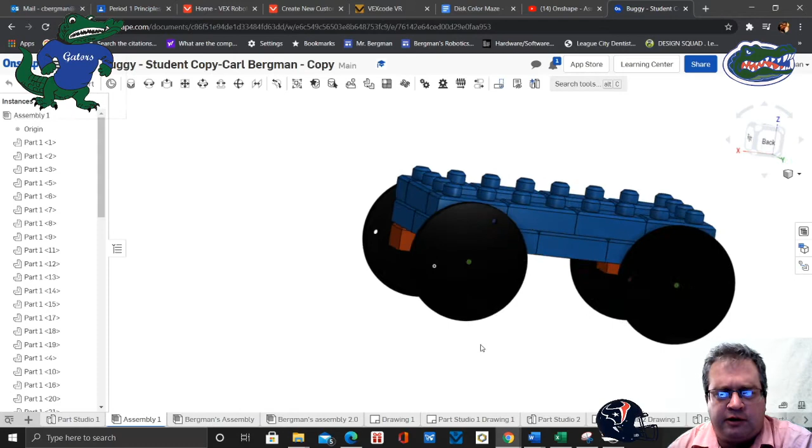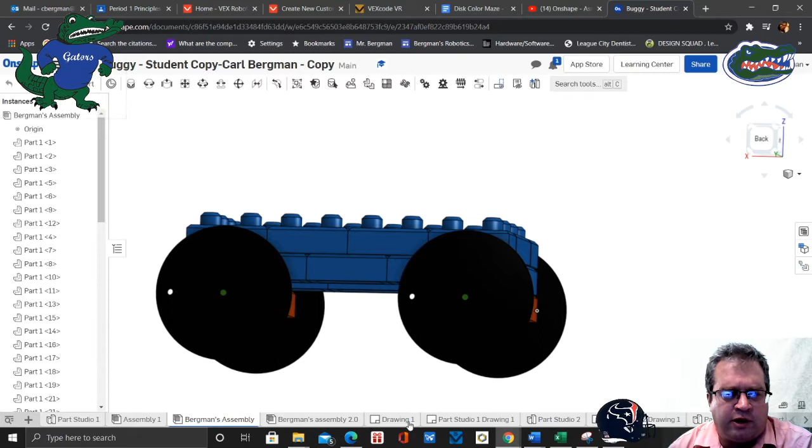This is the buggy you're going to create. The library's there for you. I'm going to walk you through it, and I'm actually going to build half of it for you, then share this with you, and you're going to finish it out. Along the bottom, you can see the different files and sketches created for this project. We're going to use 4 red bricks for the axle connection, and the chassis is going to be made out of the blue bricks.

All right, so that's drawing 1. That's your axle, and that's your wheel.

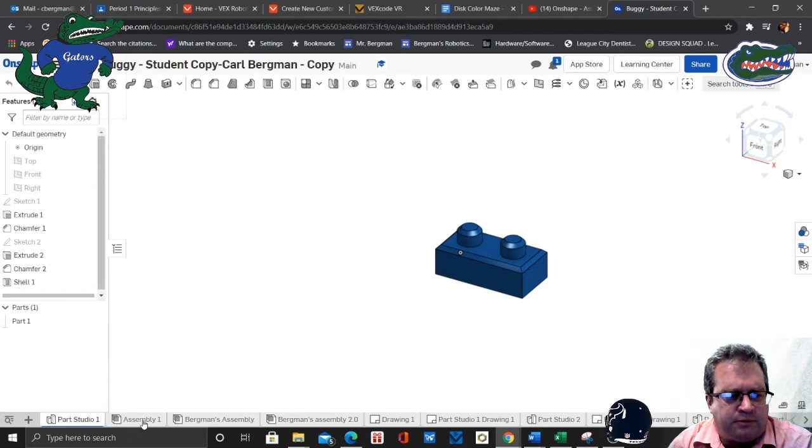All right, so what you're going to do is go to that little plus sign at the bottom, and you're going to create an assembly.

That dot is your origin in the middle, so everything's going to be centered around that dot. Let me fix something real quick.

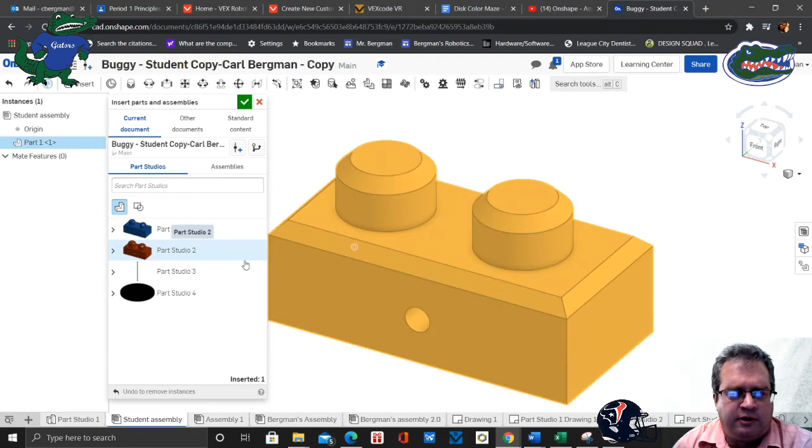You're going to insert just enough bricks to work with. You don't want too many bricks in there because it gets too crowded—as you make progress, you can bring in more. You'll need at least 2 bricks to start, and 3 or 4 blue bricks, and spread them out, zoom out, so you can keep your bearings on how much workspace you've got.

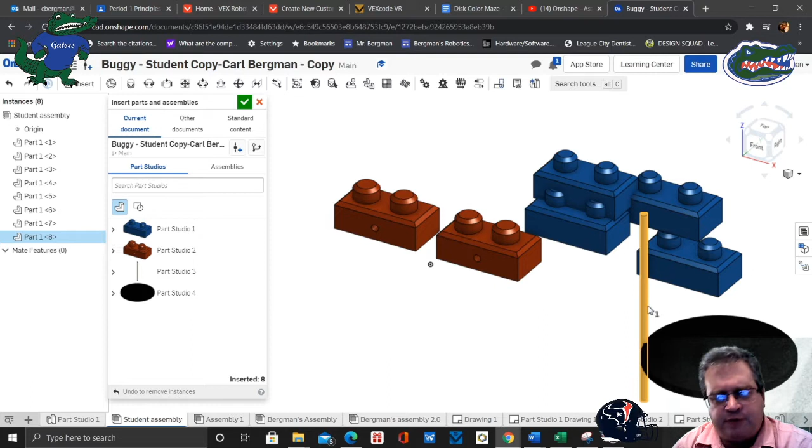And you're going to need an axle and the wheel. You want to place these on the screen workspace away from the origin, which is that dot right there.

Let's see if I can bring up the assembly. If you look underneath the buggy, you'll see a white dot on the side—that's the origin. They connect that brick to that origin, so you're working on the same plane, the XYZ plane.

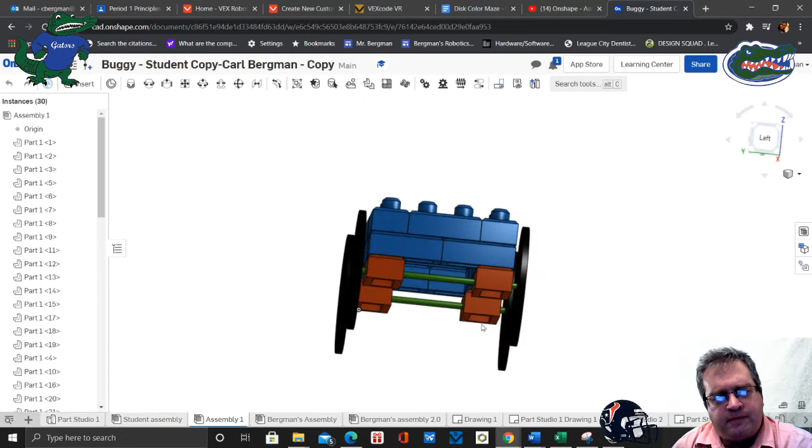All right, so we're going to take that one brick and use our tools at the top, which mates all these together. You see they put their origin on the inside—we're going to put it on the outside of that corner instead of the inside.

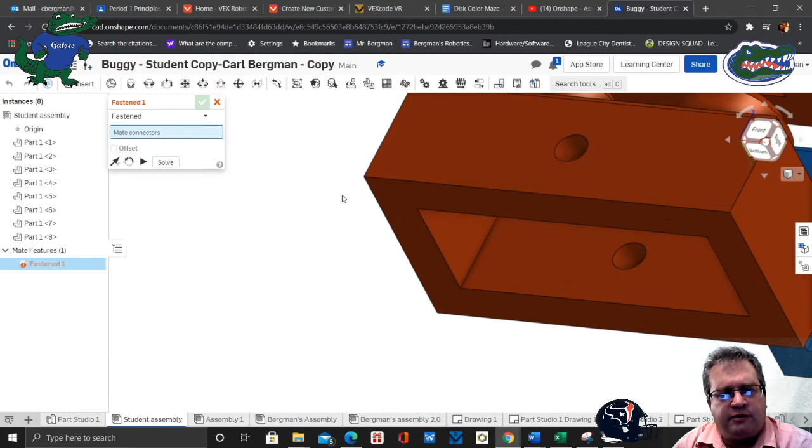This is important that you get this right, because you could be thinking you're on the right plane when you're actually on the wrong one. You've got to make sure that arrow is pointing down, that blue arrow or blue line. So you select the 2 blue lines, line them up, check mark—that's lined up, and so that brick is locked in place. All the other bricks can move around, and you start locking these things in.

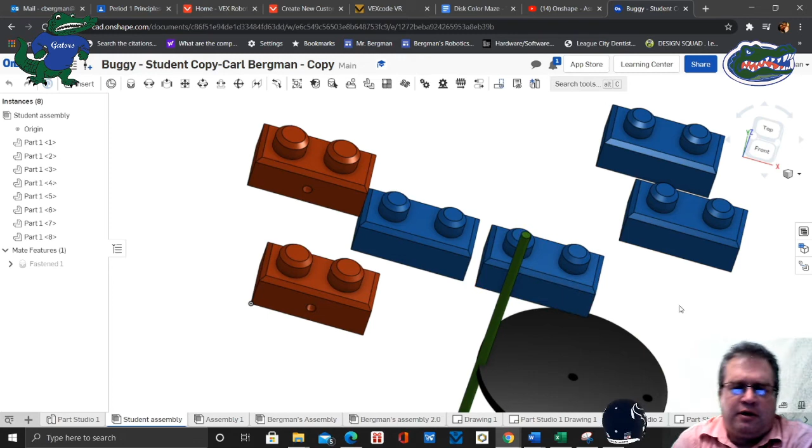We're going to move some bricks out to make some space, and now we're going to start snapping these blue bricks onto the side, because the red bricks are connected to the axles, and the blue bricks are your chassis.

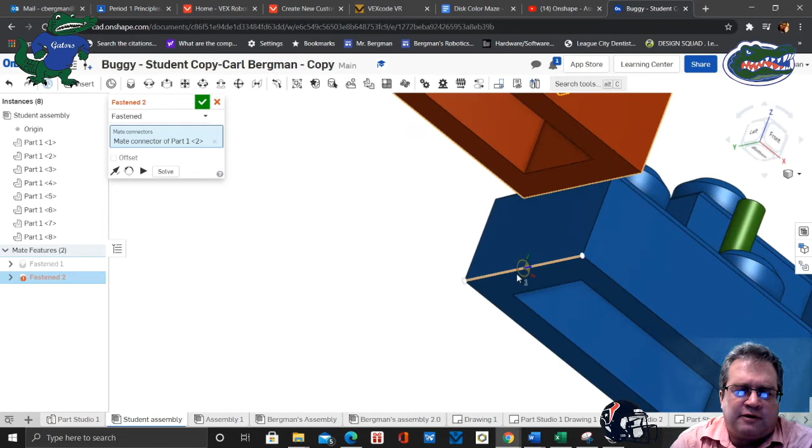We're going to pick the top dead center of that brick and line that up with the outer edge of that blue brick. Make sure you point down. There you go, lined up. You think you got it, then click your check mark, bring it out, and bingo, there it is.

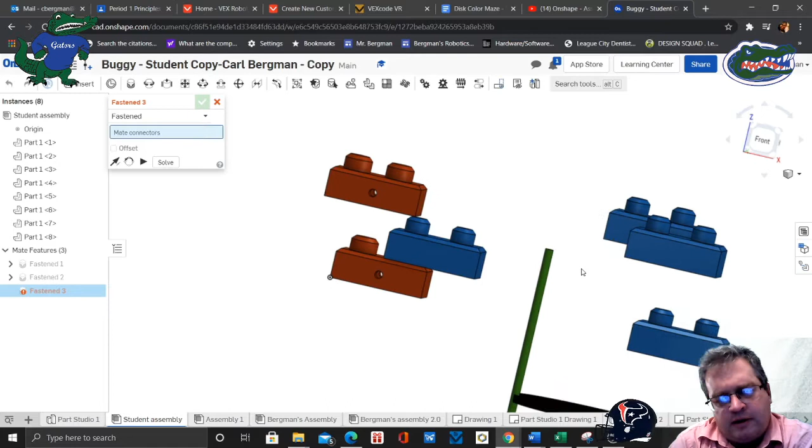All right, snapped in. Now you're going to continue building this side of the buggy, and eventually we're going to put the axle on the hole in the red brick.

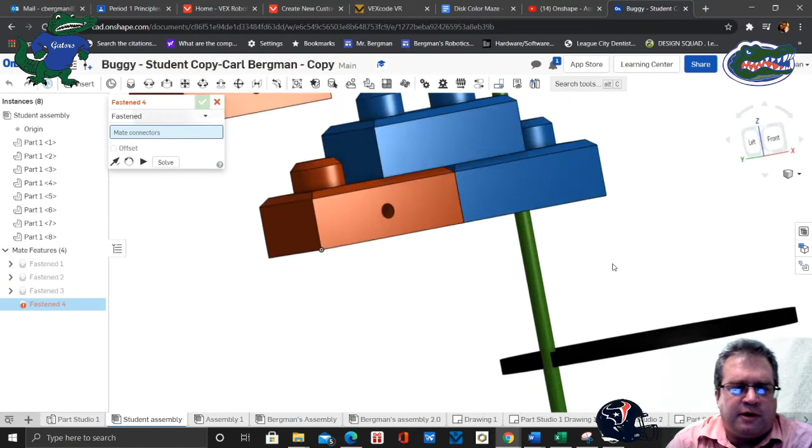All right, so now whatever bricks you're going to work with, you want to try to drag them close together. We're going to get the dead center on that one and the dead center on that one. Click it, and that's using our fastened mating tool.

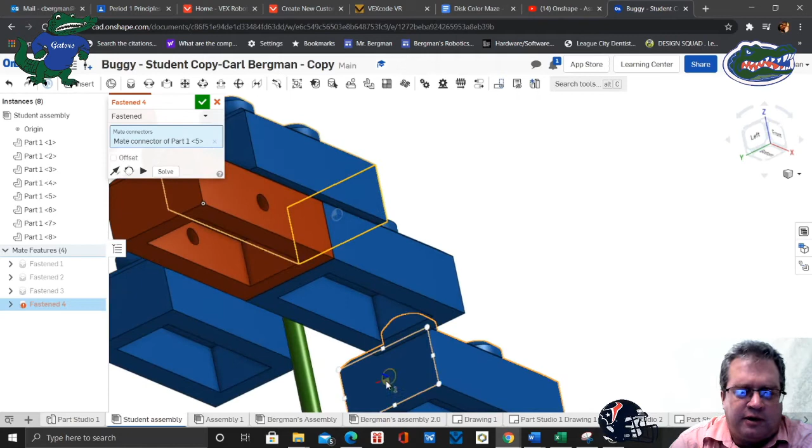Then we're going to get more blue bricks, bring them in, drag them over, snap that into the dead center on that one, then flip it around, pick the dead center on that one, and check mark. Got it. All right, so we're starting to make some progress.

It doesn't look like a buggy yet, but we're getting there. So we're going to close out the tool so you can drag stuff around, because if you leave the tool open, it does weird stuff.

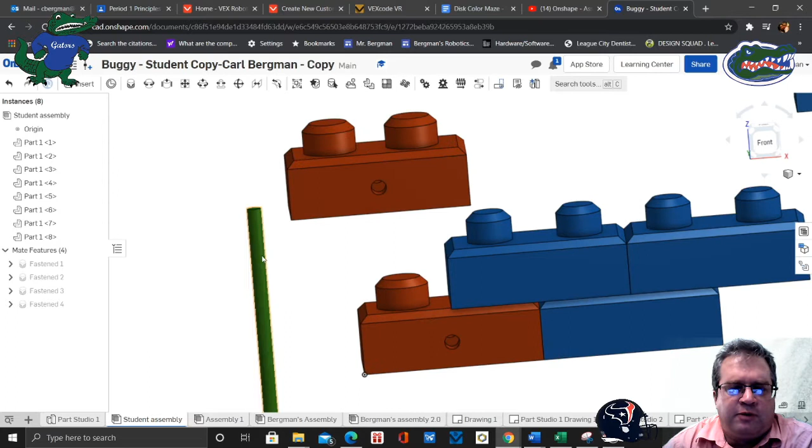So we're going to pick the revolute mating tool, because we want this to turn. We're going to zoom in on the front, the top, get that blue line, and make that go where the axle goes—make sure you've got it lined up.

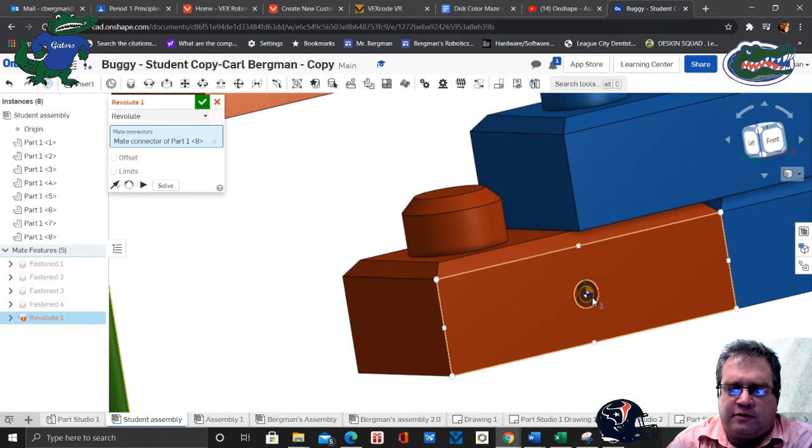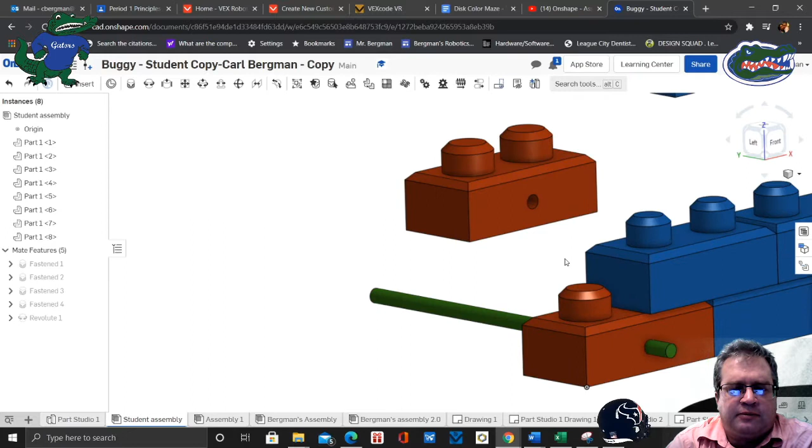We're going to have this offset by about half an inch so we can attach the wheel onto the outside of the axle. So the axle is going to be fastened to the... because we want the wheel to rotate with the axle. We want the axle to rotate, but we want the wheel to be fastened.

So we're going to pick the fastened mating tool, and that's going to be basically glued onto the axle, but the axle does rotate. If you look at the wheel, you can actually drag the wheel by clicking, holding, and dragging, and it'll turn with the axle. The axle turns, but the wheel is fastened to the axle.

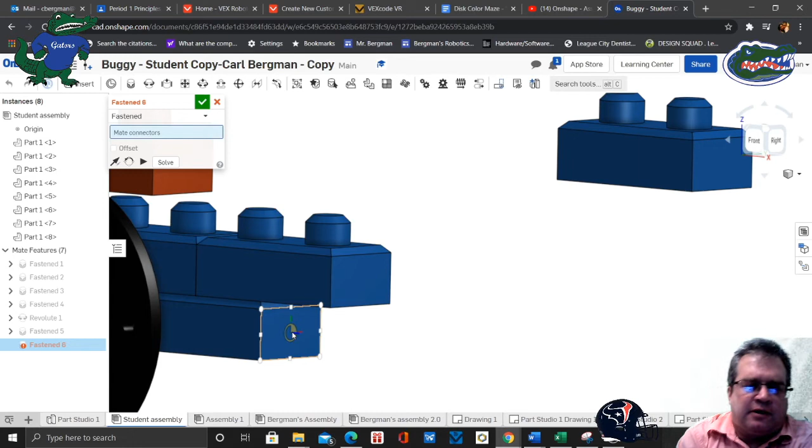So we're going to continue putting the blue bricks on there, and I think the original build shows 2 whole bricks in between each wheel, so we have to put at least one more blue brick on top there.

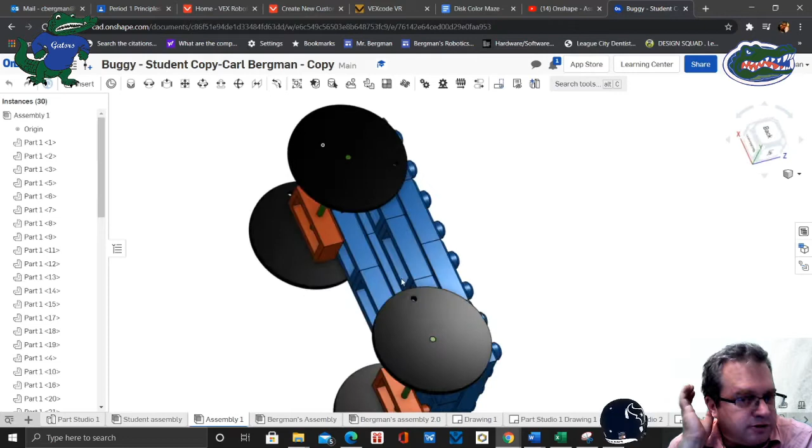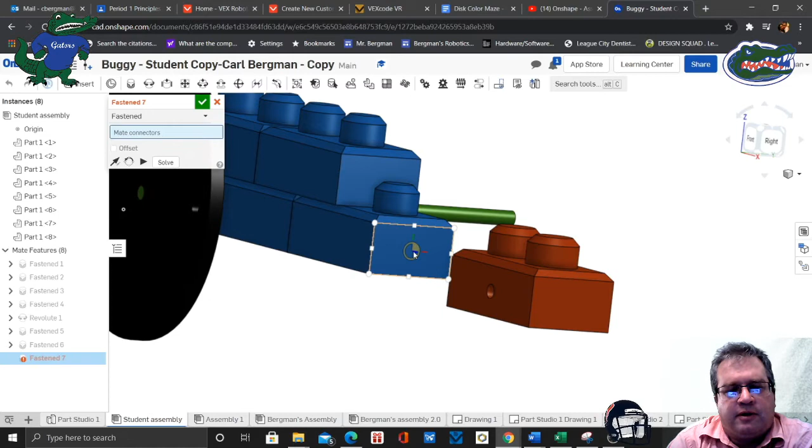So this is about the time you need to draw in. You've got 2 full brick lengths between the wheels there. So we need to bring in some more blue bricks, and you might as well bring in the axle and the wheel as well. We can go ahead and put the red brick ready to put on that bottom, and we're going to fasten that. It's like the center and center, and then check mark.

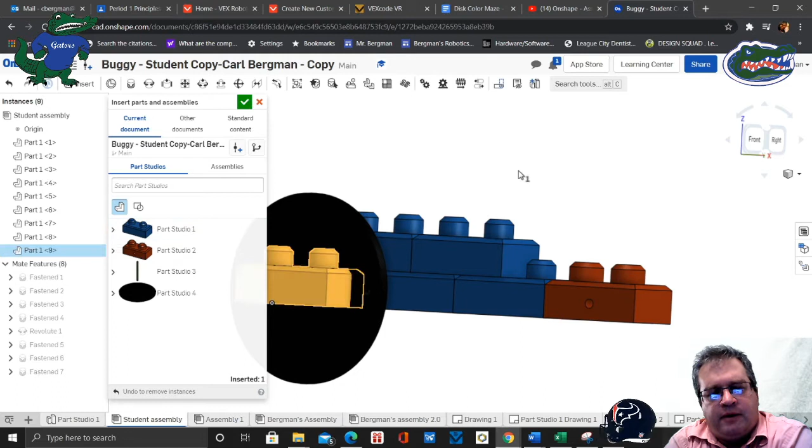All right, now we're ready to bring in some more parts. So bring in an axle, insert axle, wheel, some more blue bricks, and let's see, yeah, an axle and a wheel.

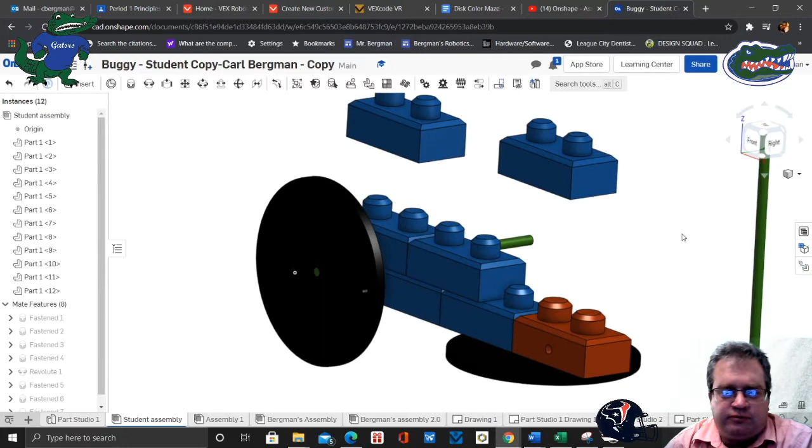Close that out. All right, so we're getting to the toughest part where we need to turn that corner. Let's put the bricks on there first, and check mark, and we're making progress.

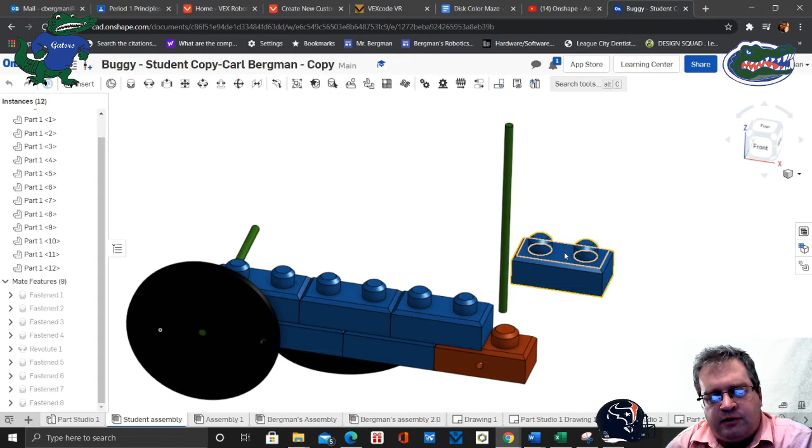So we're going to have to turn that corner, so we're going to take that blue brick and turn it 90 degrees. We're going to close that out so we don't do any weird stuff, and we're going to turn that to help us turn the corner. So you type in 90, it'll rotate that for 90 degrees, and then this is where you have to really pay attention to the close details.

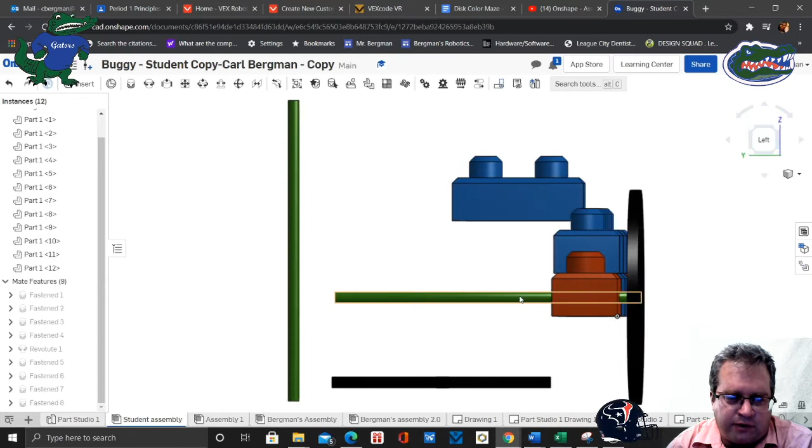We're going to shift 1, shift 2, shift 3, that recenters your object, and we're going to look at an isometric view to get a better idea of where we're going.

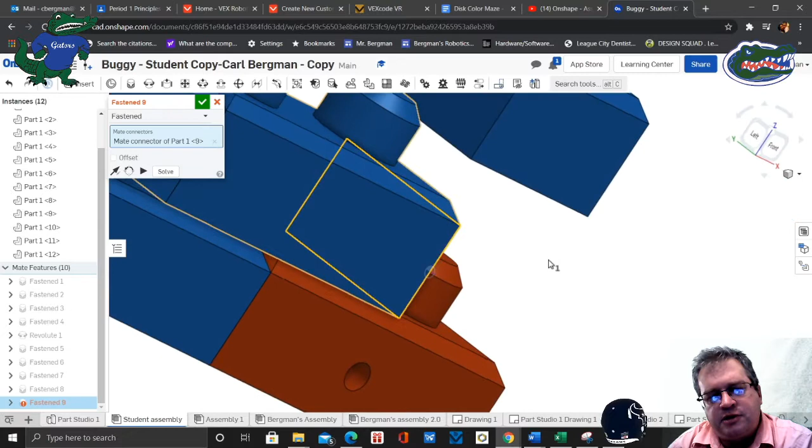All right, so we're going to click on the fasten tool, and we're going to get that center and make sure the blue line is facing the brick that we're going to attach. Hold on to the wheel, and that brings it down, or push down the wheel. Got the blue line facing the other one, and there we go. Click our check, and we've turned the corner.

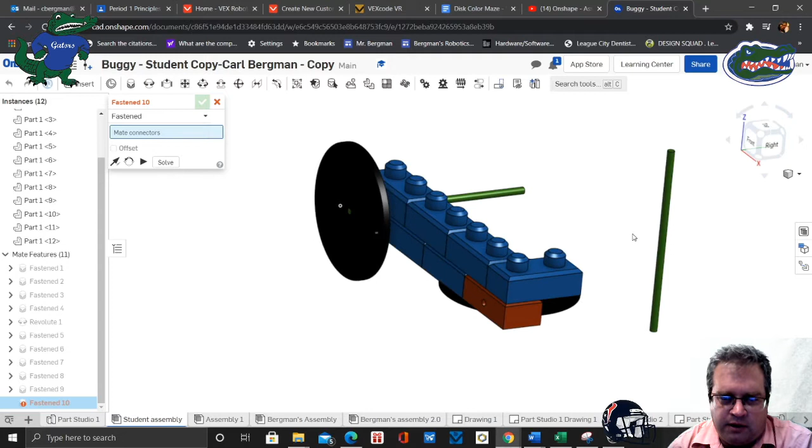So the next thing we got to do is put that axle in. Remember, it's going to be a half inch offset. So we're going to pick the revolute mating tool, and that allows the axle to rotate with the wheel affixed, fastened to it. So it's good to turn that off.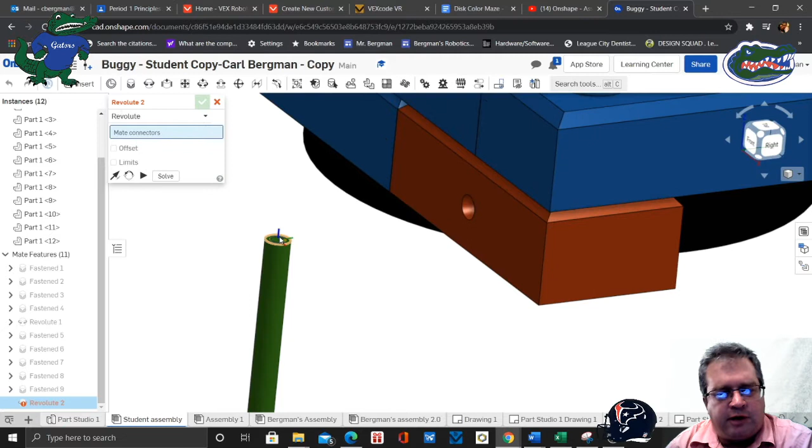That's an example of weird stuff that happens if you don't close out the tool before you move something. All right, so we're going to do the revolve, and we're going to make sure we get the line and then the line, and then we're going to offset by half an inch, 0.5 inches, and click your check mark, and there's your half inch offset.

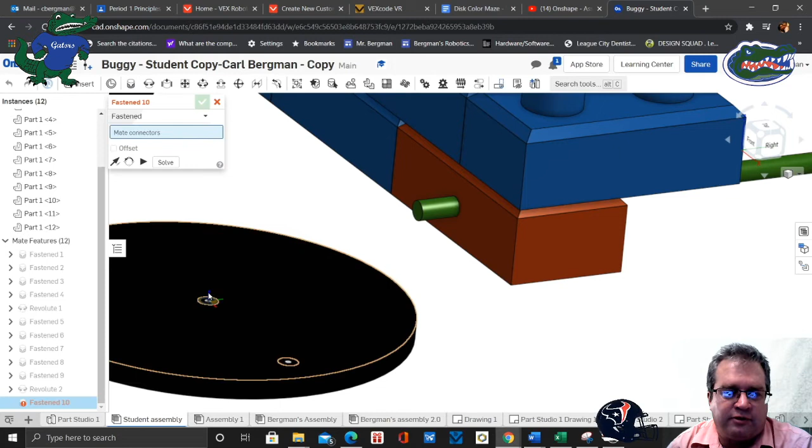So then we're going to close out our tool and drag our wheel over. Now we're going to fasten the wheel to that axle so that it doesn't rotate on its own. It has to rotate according to the axle.

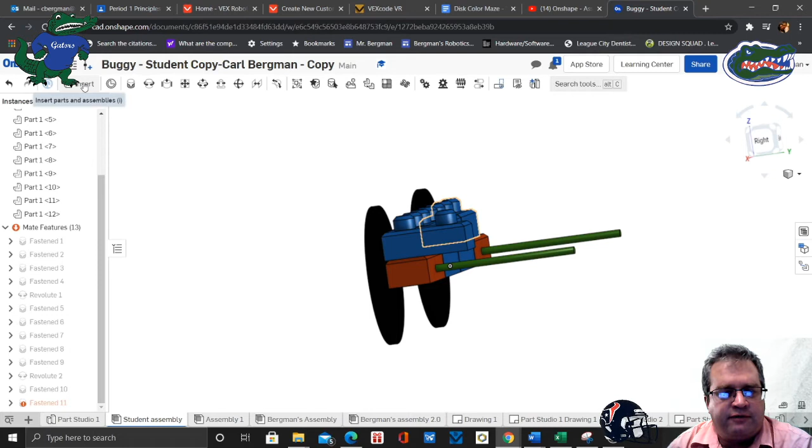So there we go, it's starting to look like a buggy, and now we're going to teach you a little shortcut, because the chamfer on the bricks, where you have your edges angled, makes it tough to do this corner without doing a little shortcut, and I'm going to show you what we're going to do.

We're going to attach the red brick first, and then we're going to work off the red brick as our reference point instead of other options. I think the best option is to attach that red brick onto the axle, and we're going to do that by, well, first we can put that on top. That one goes on top, of course.

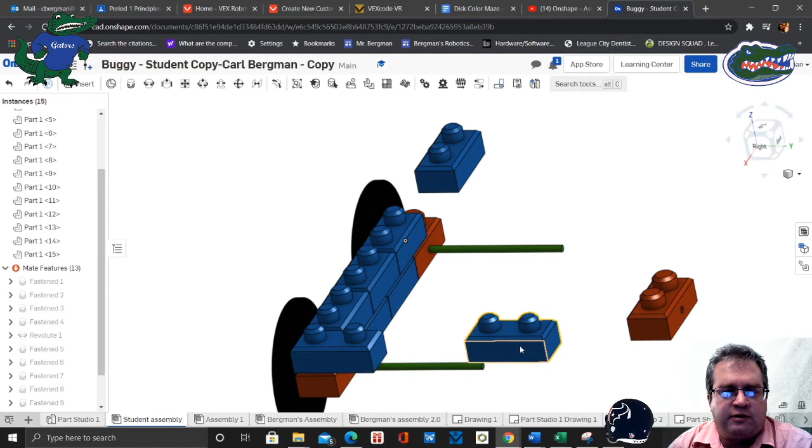Drag that over, and remember, we're going to do the fasten, and we're going to pick the center and push down on the circle or the wheel, and fasten. Okay, all right, so now we're going to put the red brick.

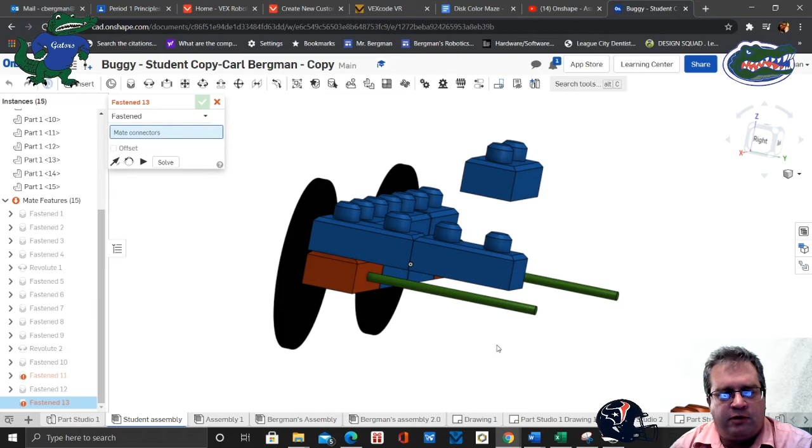So we're going to drag the red brick over, and we're going to do the revolve and half inch offset, and that'll give us a reference point to make the other side of the buggy, because the reference point we used for the other side was the origin, which is that white dot there at the corner.

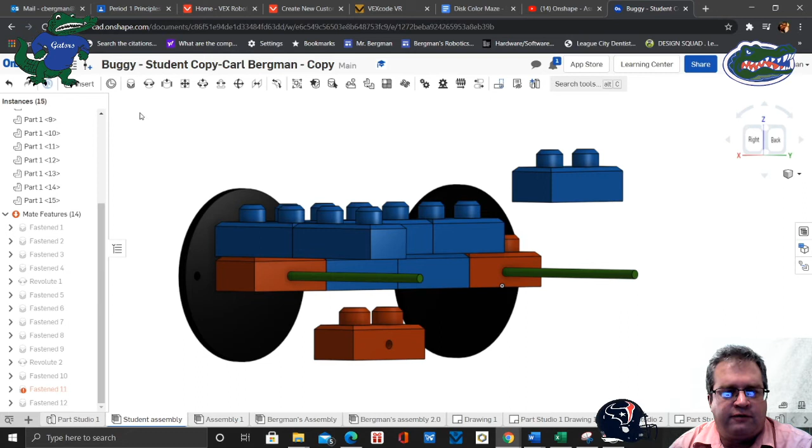So we don't have the origin point on this side, so we're going to use our knowledge that this has a half inch offset on the revolve mating setting. So we're going to get the end of the axle, there it is, and get that lined up, and we're going to do our offset by half an inch, and that is going to give us our alignment with the blue brick, which is above it. And there it is.

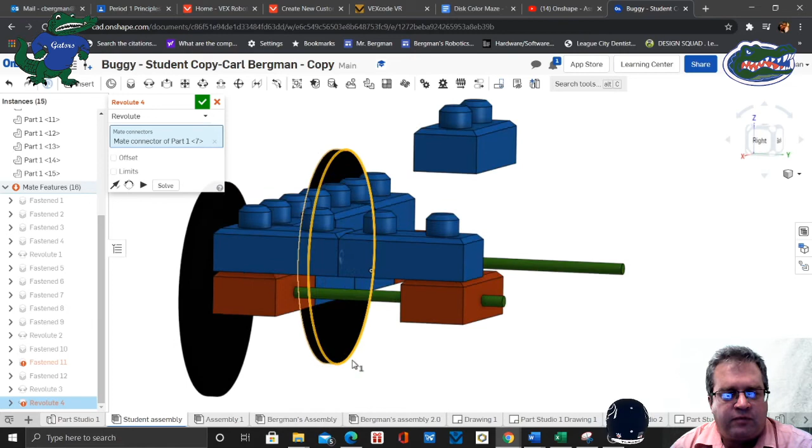There's another way to do that, but I'm going to leave that for the lesson right after this one. Alright, so now we're going to put that blue brick and attach it, and then I'm going to leave the rest up to you guys.

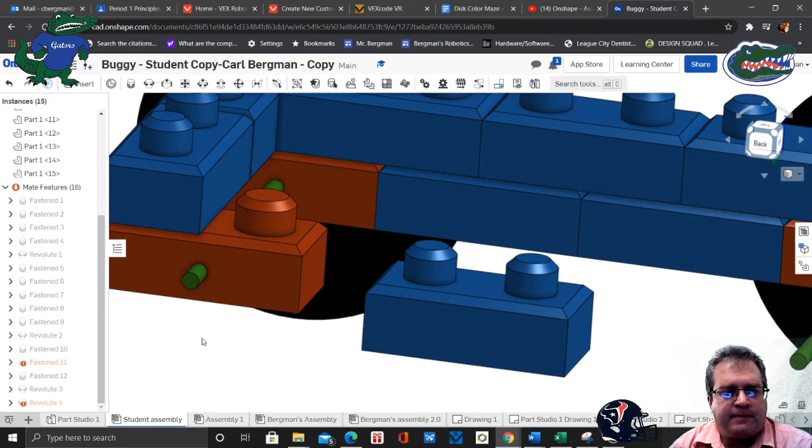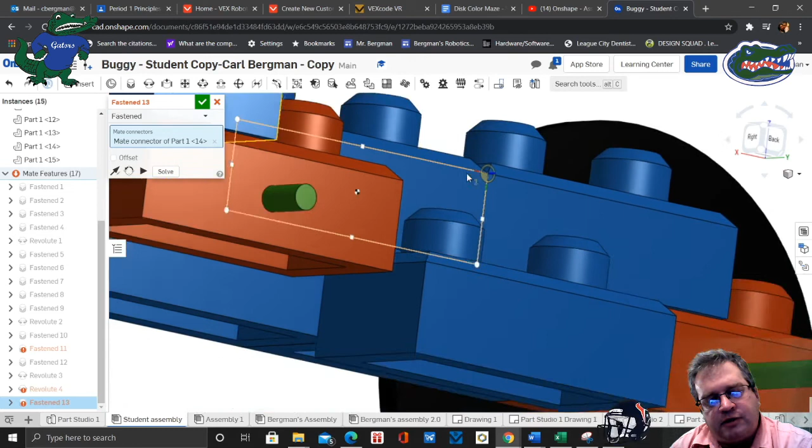But we're going to do the fasten, and we're going to select the center of that brick that's already attached, the center edge of that. So the fasten, and we're going to rotate and slide it over and make sure that that's pointing in the direction of the brick that's going to be attached. It is, and so now we're going to rotate and scroll up, and there's the line facing the brick, the second line that's pointing toward each other.

So there you go, we've turned both corners, and now your assignment as a group is to collaborate and finish this buggy.